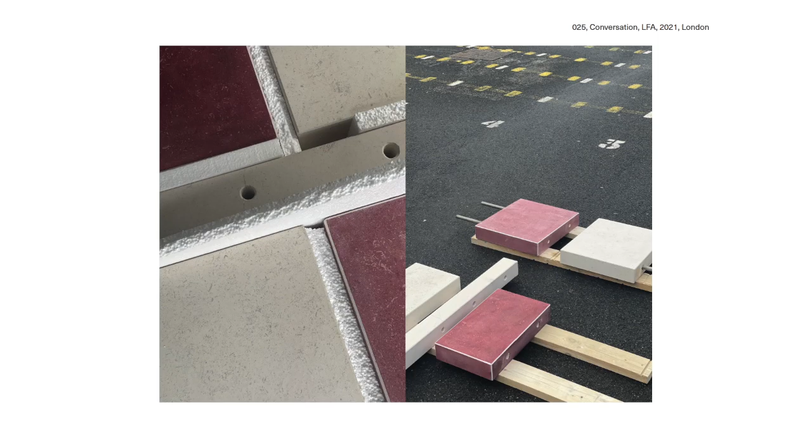So we had never built an inflatable before, and we were told by many that actually it was a terrible idea and that we wouldn't do one ever again. But let's see, we haven't yet, so we'll find out. But the project came about thanks to actually a London Festival of Architecture bench that we built in 2021, all made of stone. And it just so happens that the director of Clerkenwell Design Week saw it and wanted to put it in an exhibition in Greenwich. But it couldn't go because we had to put it into a school in East London, where it's still there, so we dismantled it and placed it there. But instead, I asked if there were any potential possibilities of working with him again in Clerkenwell Design Week, and just through asking, he said yes and had many opportunities.

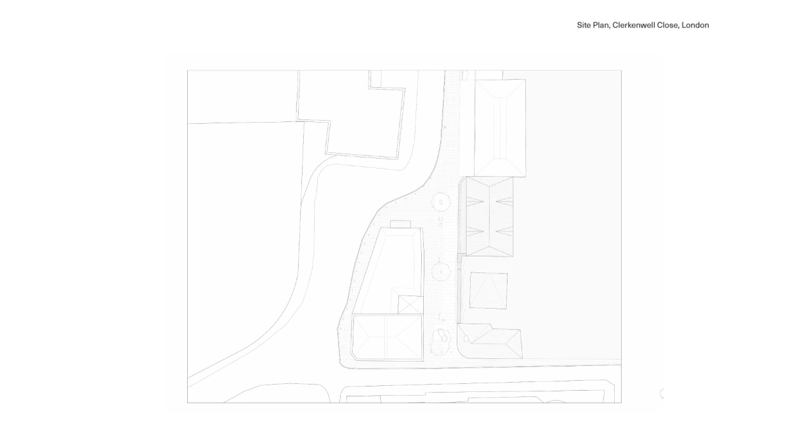So there were a number of potential sites that we could choose from, and this is the one that we chose, Clerkenwell Close, which is essentially like a pedestrian street, which has a few offices, architectural offices mainly, along its side. And it's mainly made up of some large trees and lampposts. But what we loved about it is that actually it gave us the opportunity of making a space; I think a lot of the other sites were quite busy. So here it is in 2022. And we quickly made a model just to really start looking at the forms of the site.

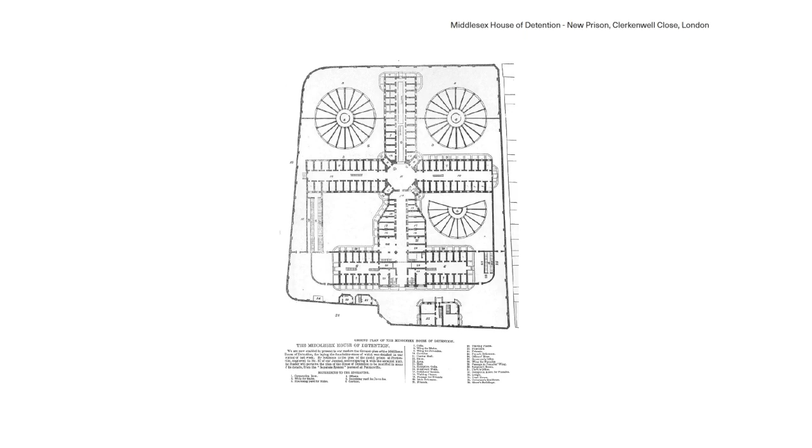The city is constantly moving, and Clerkenwell also used to be a village for London. And here we can see that, in fact, before it was a nunnery and a convent. But on this map, particularly on the top right, you'll see that actually it used to be an old prison on the site, and Clerkenwell Close didn't exist. The prison itself was a crucifix form, and then that prison turned into a boarding school. The site itself, coming from the north, has direct views, and then from the south, you have to turn into it. So that was really important to us to see.

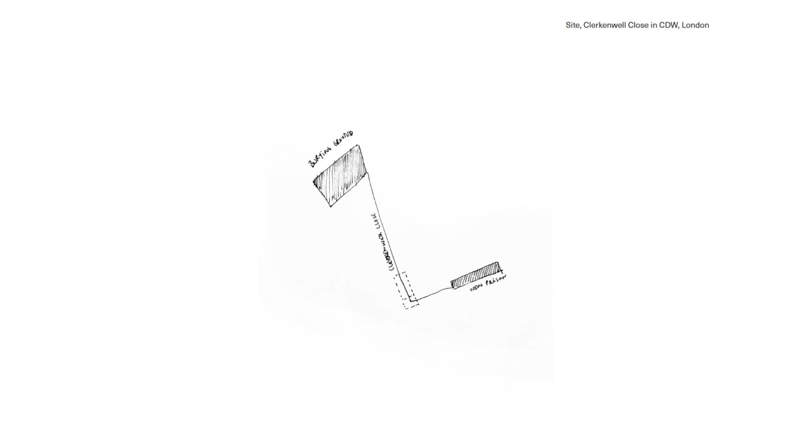During Clerkenwell Design Week, the site sits between two very important core event spaces. One is the old prison, which is called the House of Detention, basement, which actually used to house baths and fumigating rooms before a lot of the prisoners would go into the main wings, but also the Spa Fields, which is the old burying ground. And so we sit as this kind of in-between transit space. And the project gave us an incredible amount of freedom. The client actually asked pretty much nothing of us, which was extremely rare.

So we basically came up with a concept brief and all the way to construction. I was quite dubious, in fact. It sort of seemed strange that the client wanted to know nothing about the project until we actually met for the health and safety check when it was in construction on site. So that was quite worrying, but it all worked out well, so that's good.

But we did set ourselves a brief that was quite clear in 4 points. So first was to connect these 2 points. So creating a room in the street, sort of a public square, this idea of allowing people to pause and gather in a space of transit. But also what was very important for us was actually to create a beacon that you would see from these 2 points. So the materiality was essential, that it was large, that it was clear from 2 different areas.

The other one, that it had to be very fast in construction. So it had to be built in 3 days. It was only up for 3 days, and then it has to be dismantled very quickly on the 4th day. So that was only with hand tools as well. The other thing, it had to be extremely affordable. So our budget was £8,000, but I wanted to actually make some money for the office to pay for our time. So we wanted to do it for £4,000.

And lastly, it had to be extremely sustainable in as many ways as possible. So no disruption to the site, a reduction of materials to the minimum, reclaimed natural and reusable biodegradable materials, whilst also dismantling and thinking about the afterlife of the piece. The process for us is the project, not the outcome, and enjoying the unexpected experimentation of the design development through testing, drawing, and modelling was essential.

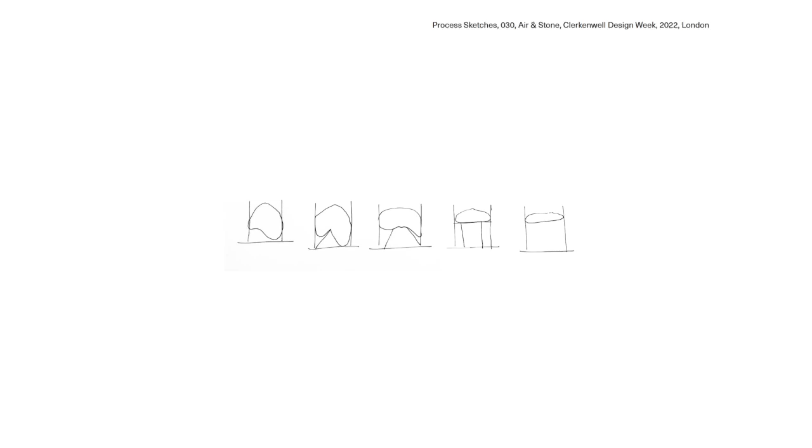So here we can see a design development, really, of this bubble, or whatever you want to call it, this blip in the moment of the space. So for us, the question was, what are the gestures we can introduce? So would it be to fill, to block, to shift, to push, to lean on, to add, to attach, to suspend, or just to surrender to the elements of the site?

So first we considered the air becoming the space, so filling the entire space. Otherwise, removing access was quite a fun idea for us, so forcing people to interact with it. But sadly, it felt like it didn't quite work with the idea of it being a public space without supervision, and someone could potentially suffocate themselves, so that wasn't the best.

And otherwise, we thought, well, actually, maybe we should raise the roof so you could see it from a distance. And we worked with a series of different solutions, this idea of potentially creating a scaffold or using helium, but helium is extremely expensive and also quite hard to find nowadays. There's very little of it left. And so until 10 days before construction, we actually had this design set to be constructed. So we'd pretty much spec'd the whole thing. This is just a detail on site, and these are engineer notes.

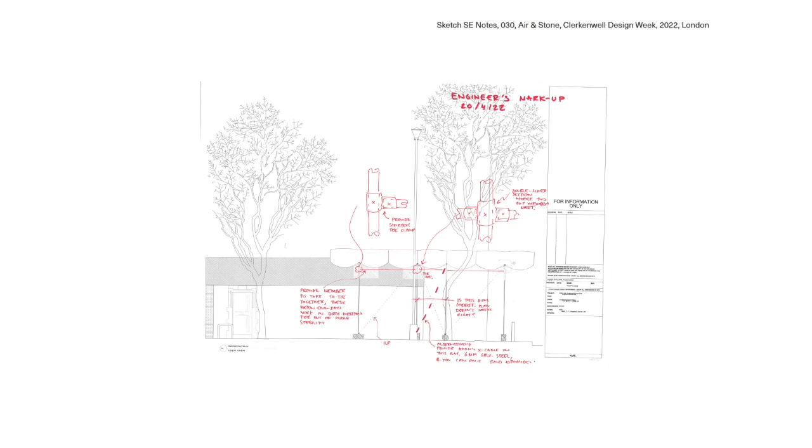So this is the first sketch that we sent to the structural engineer after many different iterations, using the trees, the lamps, and also suspending from them without introducing any further structure, made only from biodegradable TPU and held down by 3 tons of reclaimed stone footings, which you could then sit on. And then we were hoping to negotiate with the neighbours to use their plug for air, which we were still not sure of, and this was a week before.

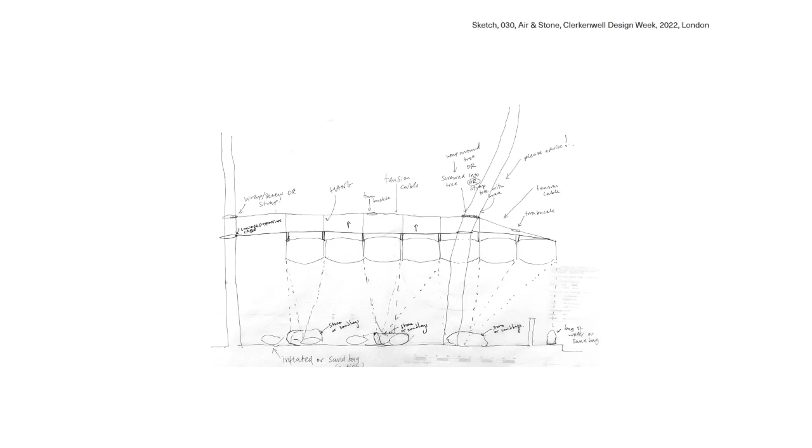So the office for about 2 months became a testing ground and a workshop. So allowing us to really just test the inflatables in different scales, experimenting with form, connections, valves, systems, eyelets, and they basically took over every space.

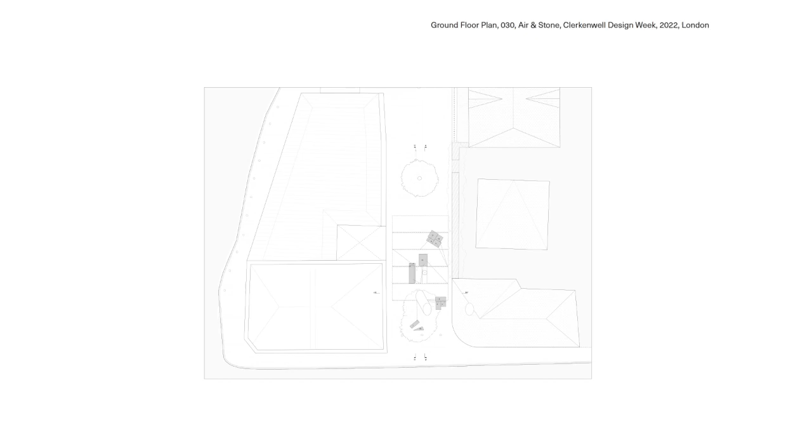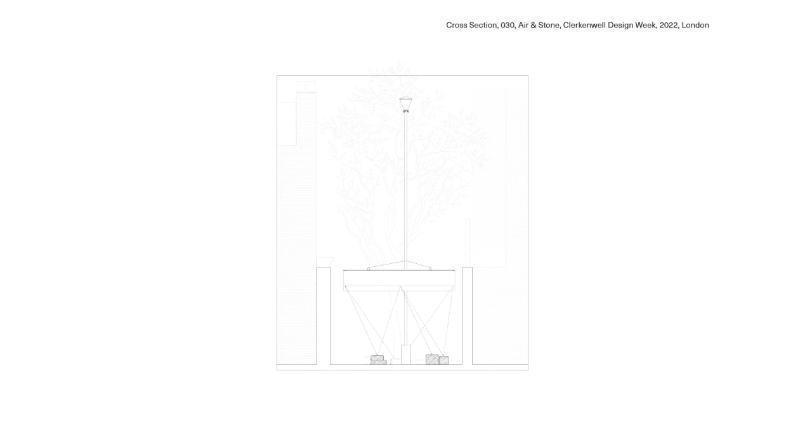So this is the final set of drawings. So this is the ground floor plan where the stone sits, placed on site. I missed one. And there's essentially two horizontal surfaces that hold two elements at different levels. So there's the air that's containing the unseen and the ground, which is stone. And this is a balancing act that plays off between one another in order to counteract the potential existing forces that could come.

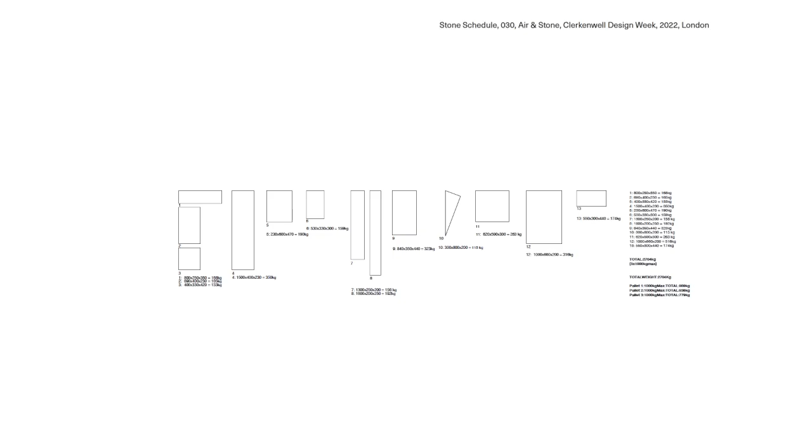And we see the inflatables and then how that comes together. So the stone was generously given to us by the stone masonry company. They just happened to have quite a lot of boulders that they weren't using anywhere. So they said that as long as we delivered it to site, we could have it. So we set out the dimensions and weights of each stone and checked with the structural engineer where we should place them according to the structure of the inflatables.

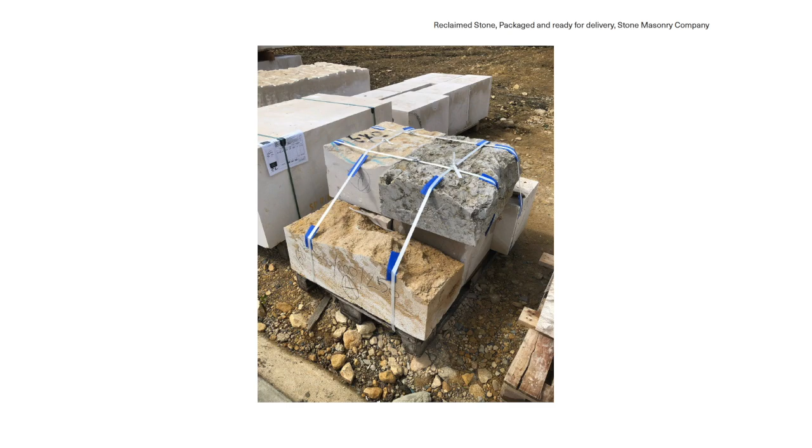And it's very much a simple act of displacement in this case. So the stones were assembled, packed, and on crates, which was the easiest way to actually deliver. It was only about £100 per crate, and delivered directly to the site a day before. And you can see here there's markings of where the stones would go.

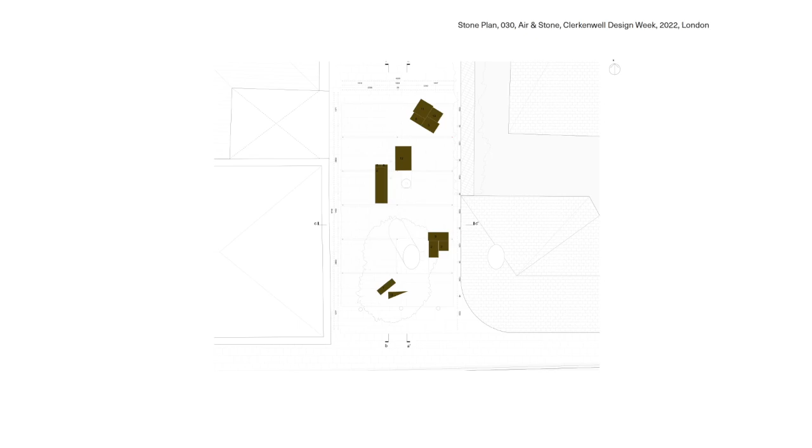But despite the rigor of the drawings and consideration beforehand, in fact, when on site, it was quite intuitive. They're extremely heavy, and there was very little time. So it was essentially just placing them as fast as we could, where we could, but with the kind of drawing set.

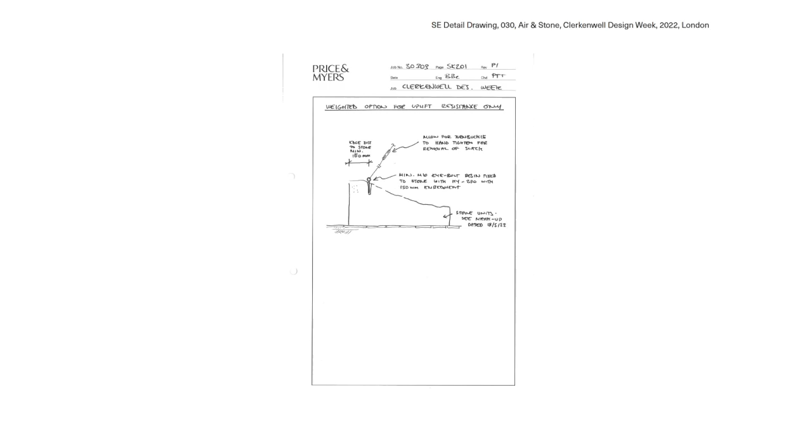So embracing that unpredictability. And then, Price and Myers were the structural engineers, and I think maybe like 4 days before, they came up with a system to attach to the stone with eye bolts and resin, and just a quick series of how we installed the metal, the steel thread onto the stones themselves.

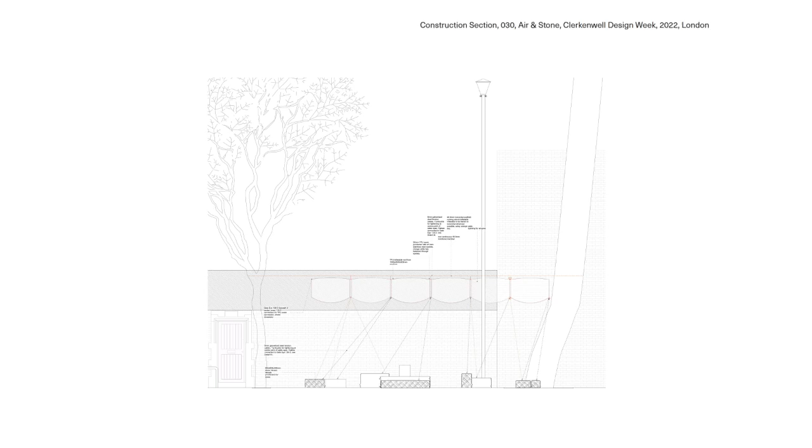The inflatables were really designed in a similar way, so we'd already designed them anyway, no matter what the structure was going to be, and they were a series of drawings to consider what area we needed. The construction schedule mainly was actually of printouts that we could cut, so we could cut them on the floor mostly, iron them. Actually, a colleague of mine was telling me that she hasn't ironed since this day, because there was a lot of ironing involved, and 2 weeks of it.

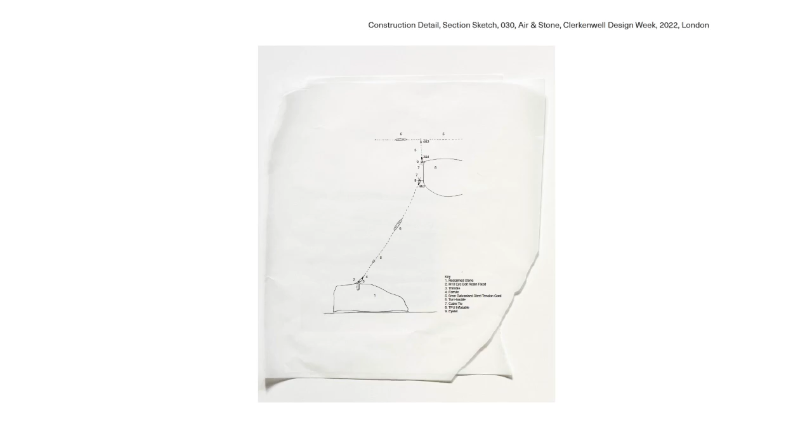And assembling, testing, and sometimes testing in different environments and weathers as well, to make sure if we needed to maintain or repair any. Our office then moved to site for those 3 days. And this is just showing how everything started to come together. So it was a series of modular systems, which were then choreographed only with quick connections, from thimbles to cable ties, actually on site, and with no disruption to the site.

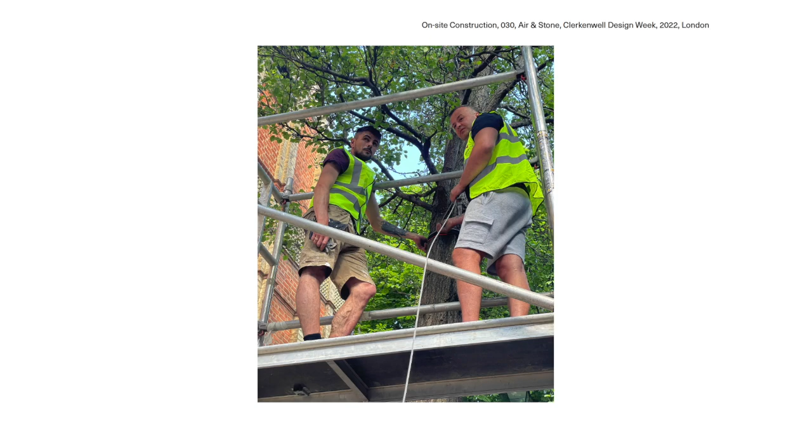So you can see here that this is a series of on-site pictures. We basically got a scaffold tower for 3 days, and 3 workmen who were working with me on another project who just happened to come for those 3 days, who helped. So we first had the stone on site, they drilled the holes, then they started to put the structure onto the trees, and then one by one, each inflatable went up.

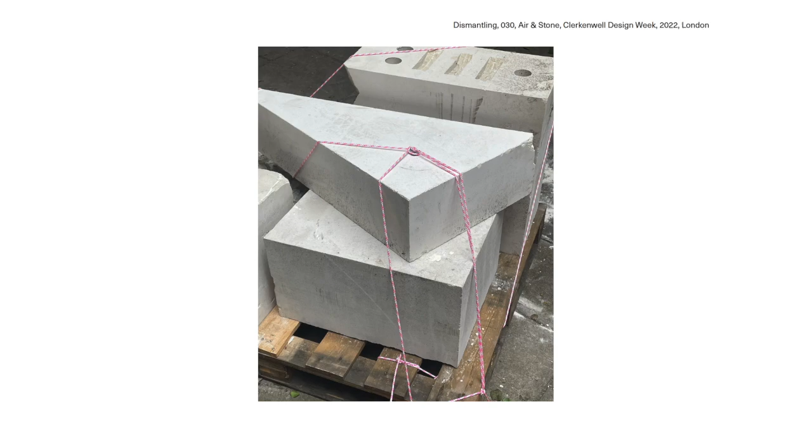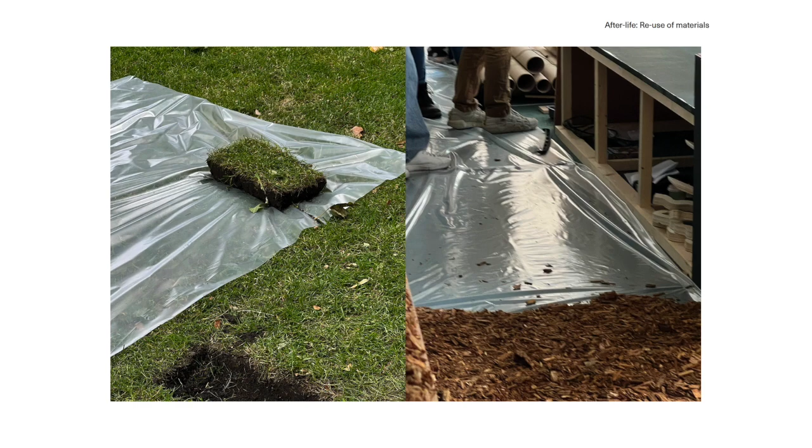There were a few days of rain, however, in May. So despite keeping visitors dry, some water did enter some of the inflatables, which actually was quite beautiful. So I quite enjoyed that. It was dismantled in about 30 minutes on the 4th day. The TPU was kept and reused. The stone was sent to landscape in Cornwall. And the TPU here has been used in a few different projects, so in Lifted Ground, another project we worked on, and then for covering carpets, etc., in different projects.

And so rethinking the ground, the project's not still, but a temporal living architecture, which remains only in photos now, but actually still exists in parts in other ways. However, fragility remains in its disappearance.